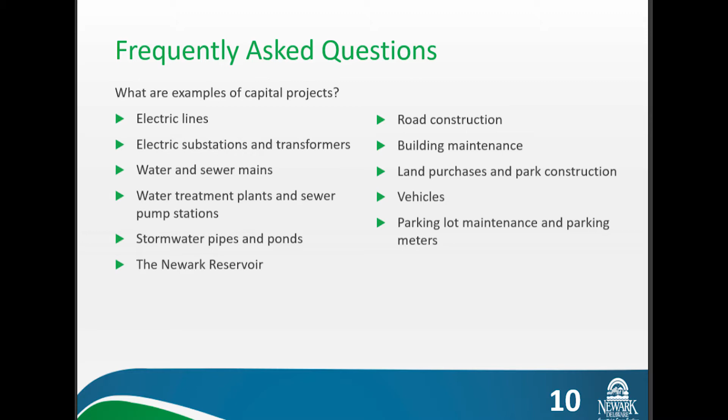Bring that home. For us, capital projects are usually things like infrastructure. The large majority of our capital spending is going to be on items like this, mainly because they're very expensive, and like your house or your car, they need to be maintained or replaced periodically. So how much infrastructure do we have? A lot. I'm going to walk through each of our utilities and give a quick overview so you get an idea of the scale.

We have the most water infrastructure by a large margin, and most of these items are quite expensive. For example, it costs us around $1.2 million to replace 1 mile of small diameter water main, like what's in front of your house. In total, the replacement value of our water infrastructure is estimated at $200 million if we had to replace it all today. That's almost $6,000 of water infrastructure for every resident of the city, and that's just the water system.

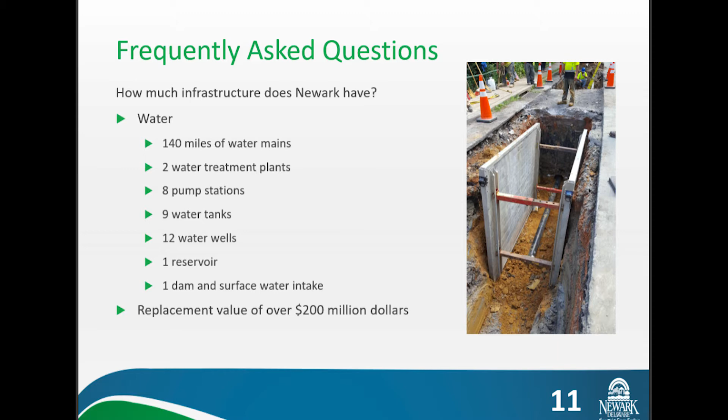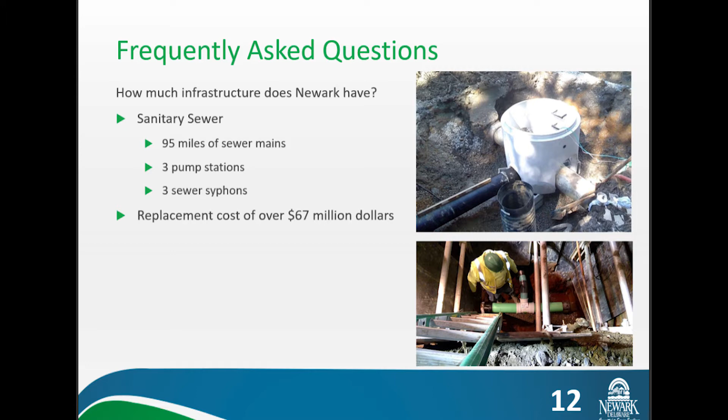We also have a lot of sewer infrastructure. The total replacement value for sewer is less than water because it can be rehabilitated a little more easily, often without digging up the street, but the value is still more than $67 million.

Stormwater is even more than sewer, at around $100 million. Stormwater is a little different in that we have different pipe materials with dramatically different expected lives, to the point that we actually track them and handle them separately. The only type of pipe we're really concerned about at the moment is corrugated metal pipe.

We refer to it as CMP, and CMP lasts around 35 to 40 years. We have about 5 miles of it here in the city, and almost all 5 miles are at or beyond their expected life. The rest of our pipes are reinforced concrete or high-density polyethylene, like that black plastic pipe you can get from Home Depot, just a beefed-up version of that. That has an expected life of around 100 years. So you can see, 35 to 40 years or 100 years - there's a dramatic difference between the two.

In addition to our pipes, we have 65 city-maintained stormwater ponds and facilities, mostly in residential neighborhoods.

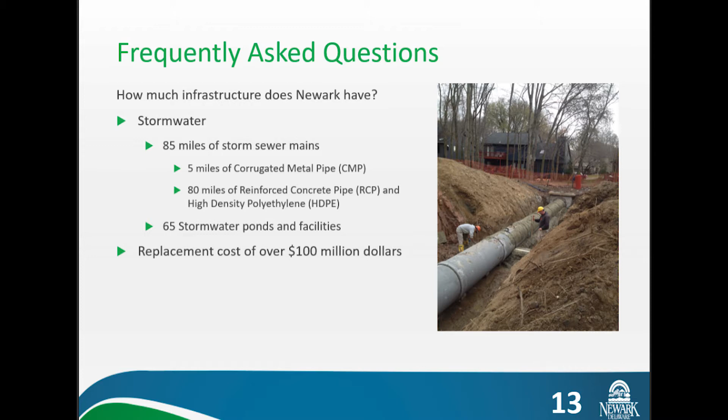Our electric infrastructure is made up of substations, lines, transformers, and our McKee solar facility off of Cleveland Avenue. We estimate the replacement value of the city's electric utility infrastructure to be at $50 million or more.

In addition to our traditional utilities, we also have parking infrastructure like our downtown parking lots, meters, et cetera. With our parking infrastructure, they're treated much like a traditional utility. The revenue that comes in from our parking fund is kept separate, and then we transfer a profit margin off of that utility into the general fund to help pay for general fund things like police, trash service, et cetera.

Lastly, we have city-maintained streets, City Hall, the police station, our parks, and other city-maintained facilities. This is the infrastructure that's supported by your taxes, fees, and those margin transfers I mentioned that come in from the different utilities.

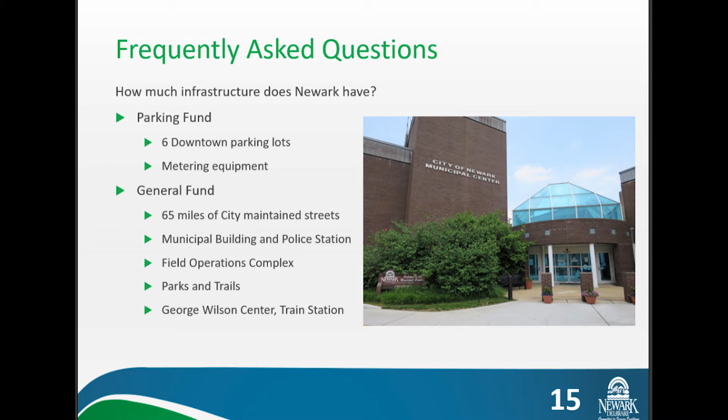In total, we estimate the current replacement value of our infrastructure and capital assets to be around $500 million. That's a huge number considering we're a city of just over 33,000 people. That means we have over $15,000 worth of infrastructure for every resident in the city. And the vast majority of it is underground, or at least out of sight and out of mind, easy to forget about until you hit a pothole, or the lights won't come on, or your toilet won't flush.

So while it's helpful to know how much of everything we have, it's even better to know what condition it's in so we can plan. So what is the condition of our infrastructure? I'm going to go through each type in the same order, and you'll see that we have different levels of information on each one.

Starting with water, I'm going to focus on mains first because they make up the majority of the water system's assets. Getting good condition assessment on water mains is difficult because they're under pressure and have to remain in service at all times, so you can't go in and take a look at the inside very easily.

We've begun piloting some technologies that let us indirectly measure the remaining life of a pipe from the outside, but they're still pretty new and expensive, so widespread implementation hasn't happened yet. In the meantime, we use a combination of our water main break history, water quality complaints, the pipe's age, the pipe's material, and industry guidelines to estimate the remaining service life and prioritize replacement.

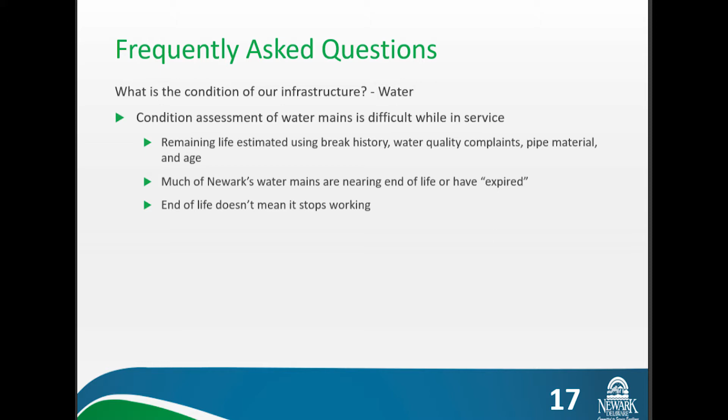The expected life for a pipe depends on a few things: the manufacturing methodology, the material itself, how it was installed, and the soil it was installed in. Generally, the longer the material's life, the longer you have in that constant failure phase.

With water mains, generally, the older the main, the longer the expected life. It's a little backwards, but essentially back in the 1800s and early 1900s, they didn't have the best manufacturing technology, so they couldn't manufacture to tight tolerance. So they would just make things extra thick. Like our water main on Main Street - we have a sample over there on the table - you'll see it's about an inch thick if you go over and look at it.

It's really thick water main, and that was put in the 1800s. So mains put in from the late 1800s up to 1930 have an expected life of 100 to 120 years.

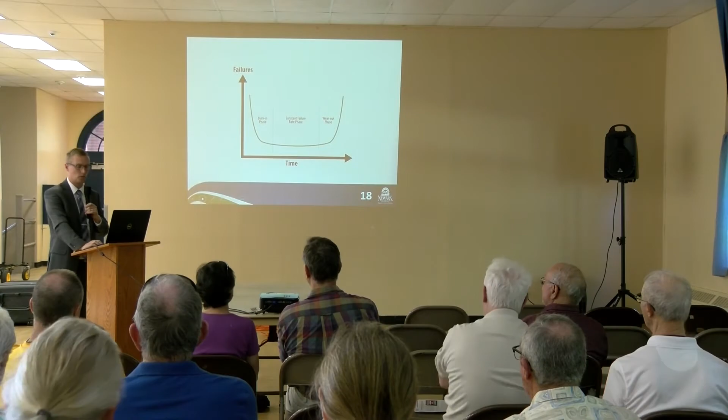So if you've got a pipe that's out in the middle of a field, and you can dig it up without impacting anyone or taking any customers out of service, you can let that pipe break all the time because it's not that big of a deal to fix.

If you've got a water main that's near a hospital, or in your downtown on a main road or an intersection, those ones are very expensive to repair. They knock a lot of customers out. So those are the ones you're going to want to replace earlier, before they start to fail often.

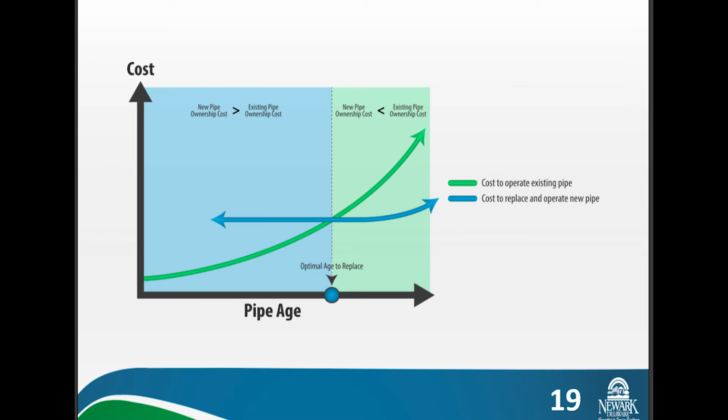So you can't see that at all. All right, I was afraid of that.

So if we continue at our current rate and replace about a mile a year, that's been our target recently—we've been getting close to it, we haven't actually gotten there very often—but if we do hit our target of a mile a year, 15 years from now 59 miles of our system will still be in that expired category, and that's 42% of the system.

And that doesn't include the 140 miles of water mains that I referenced earlier and was on the slide, that's just our distribution system. We have more pipes on the back side of our treatment plants that carry untreated water, so our total mileage is even higher.

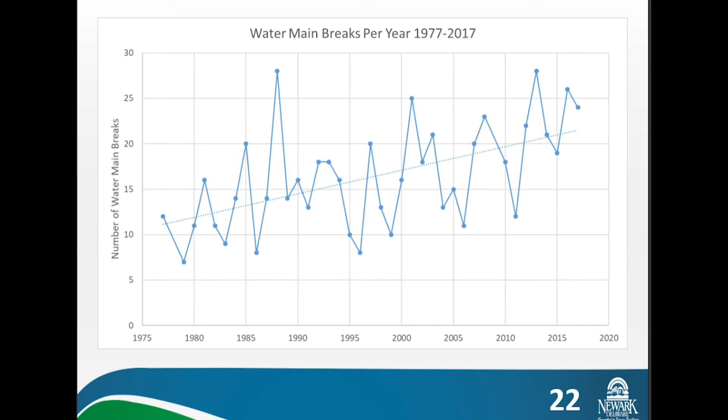So moving on from water mains. Starting around 2011, the city began increasing our water rates from the kind of artificially low rate that was in place prior to that. This allowed for a capital project initiative where we ramped up our spending on capital and started to address some of our deferred maintenance.

While water mains make up the majority of the water infrastructure, the other water facilities have a much shorter life, so they need to be replaced more often. Because of that, they kind of punch above their weight from a budget perspective. We've been really busy over the last 7 years, and we've completed over $17 million in water fund capital projects.

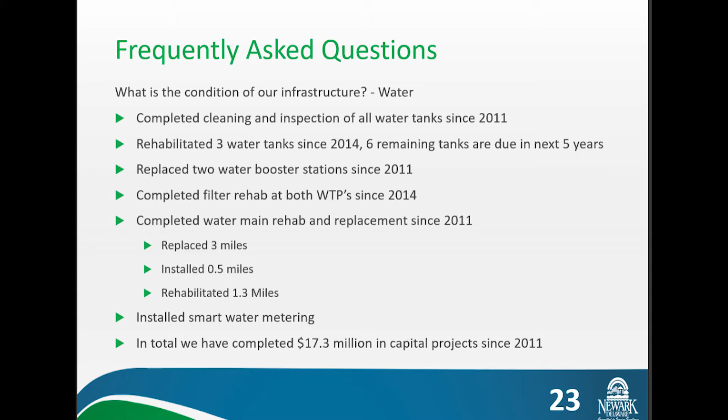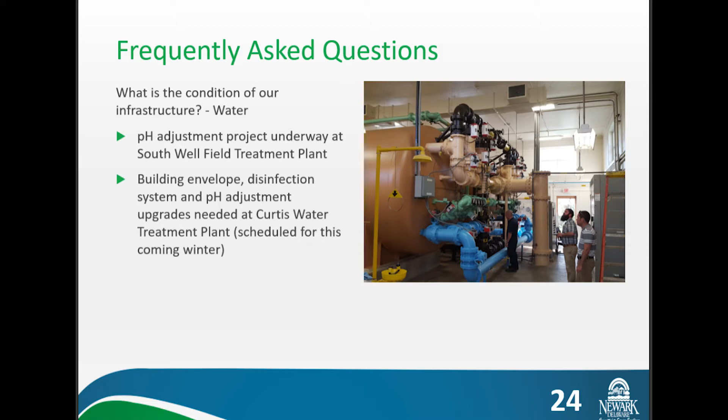We have 2 water treatment plant projects that we have underway or will be completed by the end of the year. One, we just recently finished our South Well Field water treatment plant, which was to replace our existing pH adjustment system. Our second project is at our surface water treatment plant on the White Clay Creek, to convert from gas chlorine for disinfection to a liquid system that's much safer, rehab the roof, rehab the walls. That building is about 30 years old, or a little over 30 years old, so things are wearing out there. That will be completed ideally by the end of 2018.

On the sewer side, we've been working to inspect and develop a prioritization for our rehab work. So far we've inspected about 15% of the sewer system, and we've identified around $4 million worth of high priority repairs. We began making many of the repairs during 2017. We actually have a contract underway right now that should be wrapped up by the end of the summer, I would expect. Since 2011, we've spent nearly $4 million on sewer capital projects, and we've also rebuilt all of our sewer pump stations.

The way a sewer system works is by gravity, largely. It flows downhill, the pipes get deeper and deeper until they get too deep. Then you put in a pump station that lifts it up, usually pumps it over a hill or something, and then it flows downhill by gravity again.

So in Newark, we have three major pump stations, and they've all been rebuilt since 2011.

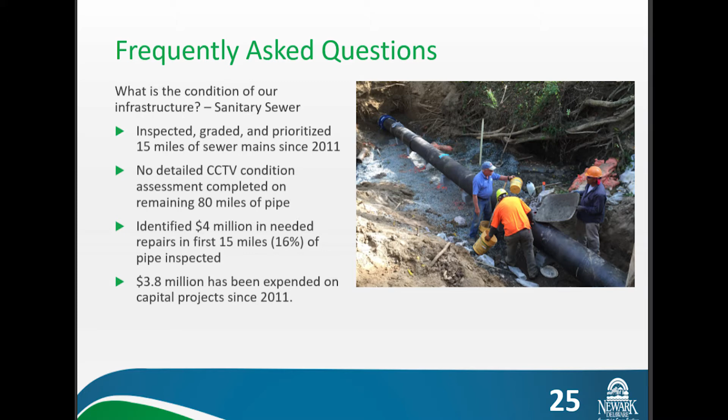On the stormwater side, we've been focused on corrugated metal pipe because it has a shorter service life. Since starting in 2016, we completed a citywide condition assessment and did closed circuit television inspection, where we send a robot up the pipe with a camera to inspect the inside of all 5 miles of pipe. After the inspection, we reviewed and prioritized all the lines, and identified about $3.4 million worth of repairs needed over the next 10 years or so.

As many of you may or may not be aware, Council approved last year a stormwater utility that came into effect on January 1st of this year. Because of that, we have a stable funding source built in, and when we set the rate for that stormwater utility, it had all these projects included in the base rate. So we have the funding we need to do the next 5 years at least worth of corrugated metal pipe repair. That's a great thing.

But that rate was not set to pay for the Rodney project because we weren't there yet on that project. So if Rodney's approved, as we'll discuss later tonight, it'll affect the average residential homeowner about $1 a month.

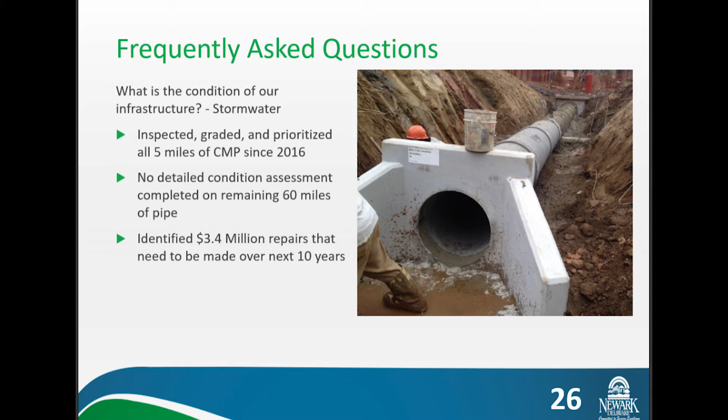For our road network, we have a full pavement management system where we complete an annual inspection of all the roads in the city that are city maintained. We rate them, then run them through an optimization program to develop an optimal project from a cost perspective. One outcome is we ran a few scenarios of trying different spending levels, to see what it would take to maintain all the city's streets at their current level so the average condition citywide doesn't decrease, just stays the same. In order to do that, we need to be spending about $1.75 million a year in today's dollars.

That's a number we've only been able to achieve one time since 2011. We came pretty close last year, within probably $50,000, but we didn't quite get there. Most years we've been closer to $1 million. In addition to that, we have about $1.5 million worth of parks capital maintenance scheduled over the next 5 years that needs to be completed.

So how do we get ourselves into this situation? Well, using only cash limits our ability to tackle large projects because they crowd out smaller, less sexy projects and preventative maintenance. It's a lot more exciting to have a new ribbon cutting than it is to replace a pipe that's generally worked your whole life.

Our water and sewer rates are also entirely consumption-based. So if you leave and go to Florida for a month, you'll come back and your water and sewer bill will be $0. You get it out of the mail, we mailed it to you. The pipes still had to be there the whole time. Our water plant still had to be there. If there's a fire, the fire company could still come and put the fire out in your house using water. So there are lots of benefits you get, but you literally pay $0.

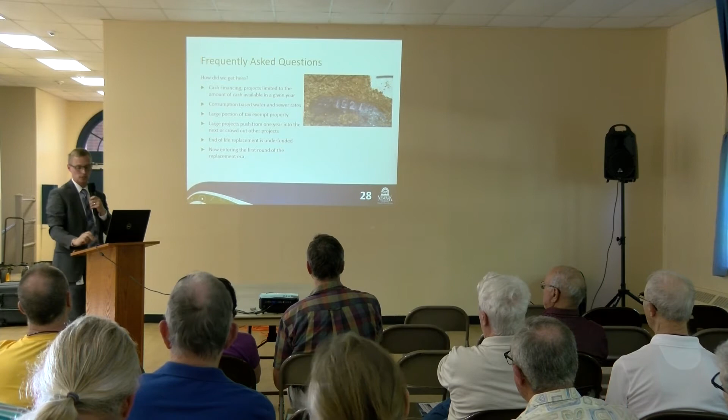Now, all those things said, the biggest issue is that we're entering the first round of the replacement era. Like I mentioned earlier, we're seeing the echoes of the post-World War II development boom. So historically, we have not had to pay for most of the infrastructure we have, or at least through our rates, because it was paid for by developers or the federal government through grants.

So when new development's built in the city and everywhere else, the developer puts in the water mains, puts in the sewer mains, pays for the electric lines to be put in, and then you pay for that as a home buyer the first time you buy your house. But the water, sewer, and electric rates never had to pay for that infrastructure in the first place. So the rates are not set at a level that will be able to pay for that infrastructure.

So even the mains that were installed for the city by a contractor or through a grant that we got directly were generally assessed against the property owners along that road frontage. So if you had 100 feet of road frontage, you were assessed 100 feet's worth of that project cost.

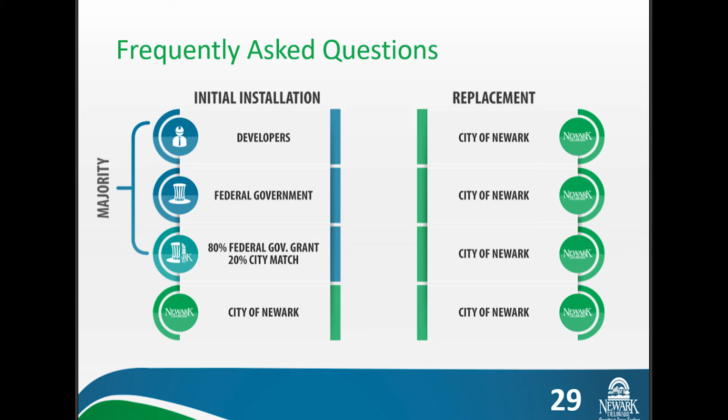So like I said, our tax and rate structure has never had to pay for any of this stuff before. And as it wears out, the revenue demands for our utilities are going to increase significantly over the next 20 years. In addition to that, a large majority of Newark's been developed in an unsustainable development pattern, and that's suburban-style single-family homes. So if you live in a single-family detached home, I can almost guarantee you're not paying enough to cover the infrastructure necessary to support your house based on our current utility rate structure and tax levels.

For example, if you live in a house with a 100-foot wide lot, your taxes need to support, in addition to police and trash and our code enforcement, the paving and maintenance of at least 50 feet of that road frontage, because you figure the neighbor across the road's got the other half. Same goes for your water, sewer, and electric infrastructure.

So using our current cost for water main replacement, 50 feet of water main costs over $11,000 to replace. Assuming 10% of your water bill goes towards infrastructure, using an average water customer, it will take 300 years to pay for that 50 feet of water main, let alone all the other infrastructure like booster stations, water treatment plants, and that sort of thing.

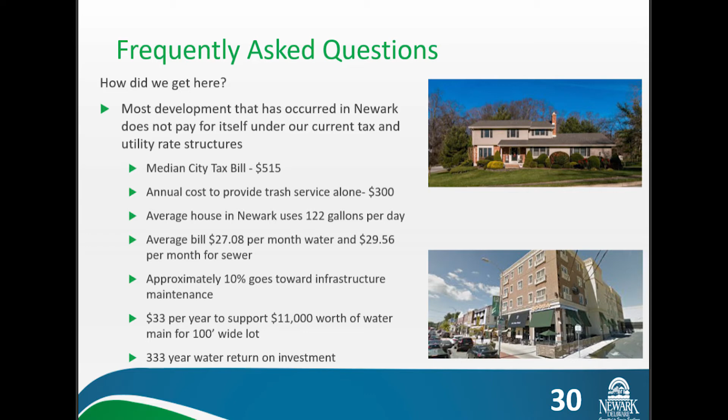So fortunately, we have locations like our downtown, so that building, 58 East Main Street, where Qdoba and Honeygrow is. I ran the numbers for that building, and it will pay off its water main every 2 to 3 years. So we see a very similar pattern in our tax structure and basically all the utilities that use water as an example.

So the median city tax bill, if you didn't know this, is $515. The cost for us to provide trash service to a house for a year is $300. So in the city, 20% of residents aren't paying enough in taxes to even pay for just the trash service that they get, let alone everything else.

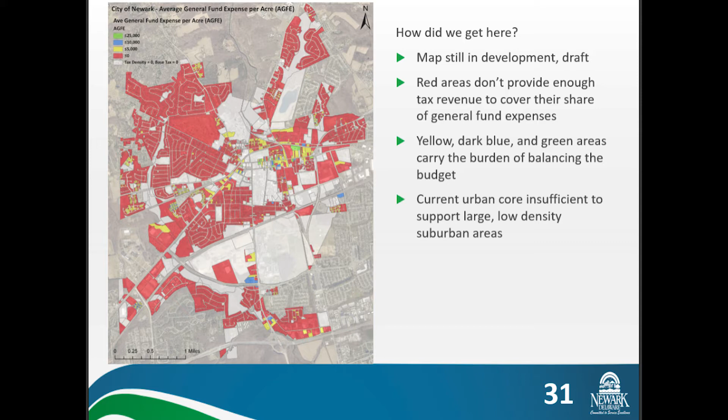So I'm not trying to say, if you live in a condo, you should defriend all your friends and live in a single-family home or anything like that. That's not the intent. The intent is just to have a discussion about where we are in our current situation, so we can make smarter decisions moving forward when development plans come through. We can make decisions with our eyes open and fiscally sound decisions.

So, like I said, it's been a lot of doom and gloom up until now, but it's not all bad news, and I can tell you it's definitely not unique to Newark. Cities across the nation are facing the same problem - cities, towns, and states, believe it or not. They're facing it whether they know it yet or not.

Fortunately for us, we're in a lot better situation than them specifically, but also a lot of our other peers, for several reasons. Firstly, since 2011, or maybe a little before then, council has shown a real desire to tackle this problem and get in front of it. And that's reinforced by the fact that we're here today having this conversation.

We also have a relatively compact city compared to our peers. Dover, for example, has 2.5 times our land area and only 10% more people. So they're going to have to pay for, extrapolate out, 2.5 times as much stuff with only 10% more people. So they're in a much worse position than Newark is.

We're also in the very fortunate position of having the Star Campus, a 270-acre blank slate on the south side of town that will be bringing all new revenue to the city.

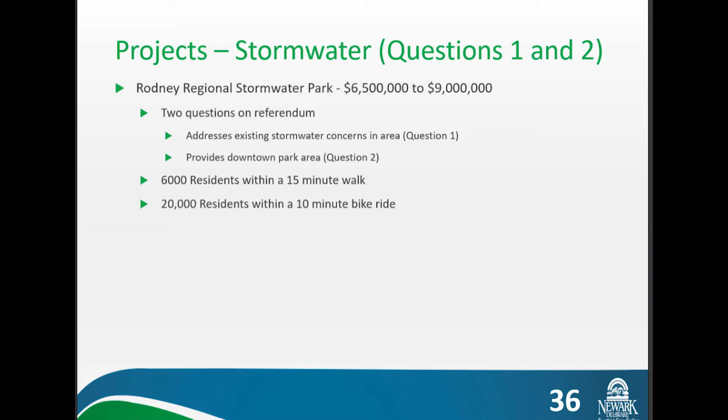So Rodney, question 1, as Tom said, there are 2 questions. One is for the purchase and development, and the second question will be for the parks amenity. Although the project vision was to develop the pond and park together as complementary, we were able to break out the stormwater management needs from the aesthetically pleasing park amenities into 2 questions on the referendum.

A yes vote on the Rodney question 1 would authorize council to borrow money from the state revolving loan fund, which Dave will discuss a little bit later, for the purchase of the property, the demolition and environmental remediation, pond construction, and some minor amenities to allow site accessibility and to maintain the current pedestrian pathway from Dallam Road.

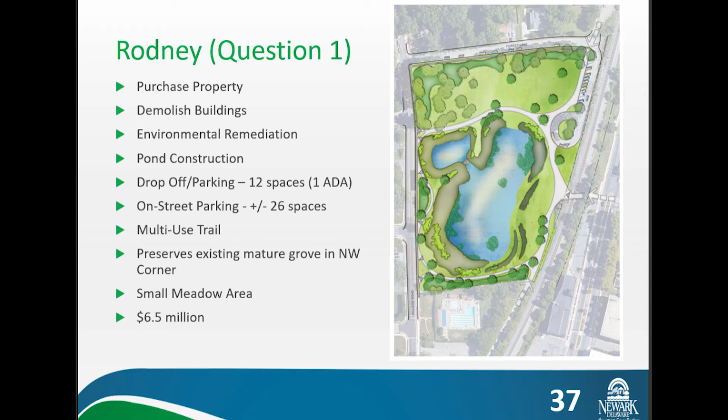The estimated cost associated with this question is about $6.5 million, which Dave will explain a little bit later. Part of that is the fixed cost in the purchase from the university.

A yes vote on Rodney question 2 would authorize council to borrow money from the state revolving loan fund to fund the majority of the park amenities that were discussed and chosen as part of public workshops in the summer of 2017. Residents who participated in this discussion agreed that passive recreation coupled with small classroom space and picnic areas was the best fit for the space.

An accessible fishing pier was also included, but we don't anticipate needing to stock the pond. Most ponds generally end up with some fish in them by birds and other methods, so if it became so popular that we needed to, we could look into stocking it. Extensive educational signage and elements would also be integrated into the site to show residents and visitors the role stormwater management plays in our ecosystem and our city.

As Dave Del Grosso will discuss, the funding for the park amenities through the revolving loan fund is locked at 2% through the state, and the approval is actually awaiting our signature. Funding these upgrades in future years with other sources of funding or revenue would cost more than the 2%.

One quick question, one quick thing.

It's important to remind everyone, I don't know if anyone here came to any of our presentations as we moved through Rodney - we appreciate it, thank you. We had a fairly robust group of folks come out to all three, and we selected these options based on the feedback they gave. It was interesting to see what everyone wanted, and when everybody's answers go up on the board you can clearly see what people wanted. Beer garden showed up, but currently we can't have alcohol in parks. Trails and stormwater management became the top two.

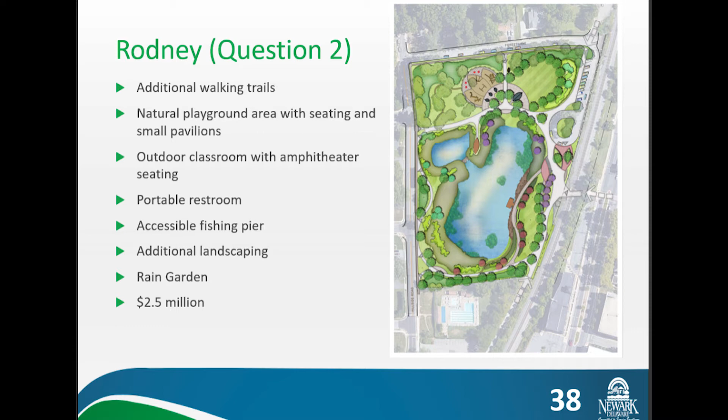Dave will elaborate on the need for debt a little later. So I'm going to get into the individual projects and a little detail on why each one is important to maintaining our water utility.

The Laird Tract well field restoration is actually a new project on some old wells. We anticipate it would nearly double our drought resiliency and bring back some production that was furloughed when the reservoir came online. These wells used to pump directly into the system, but because of high iron and manganese content, we weren't able to pump them into the system once the treatment plant came online. Now, with the reservoir online, we believe we can pump these wells directly into the reservoir and allow the aeration there to take care of some of the treatment, then bring that down to our treatment plant to treat the water and send it out.

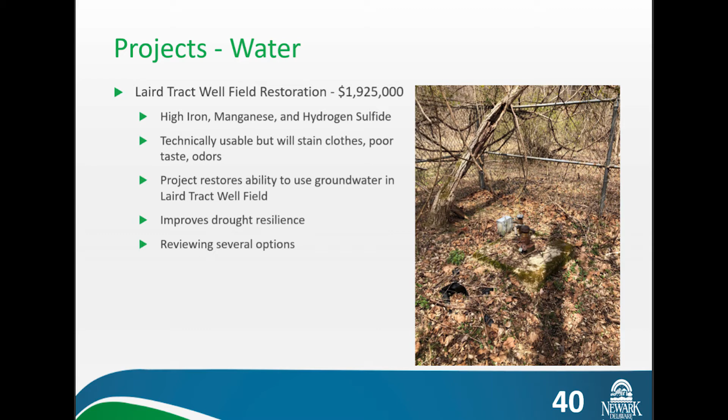These wells are protected, mostly within the White Clay Creek State Park and bordering lands owned by the University of Delaware that are generally wooded and not subject to residential or industrial commercial development - some of the most protected areas of the city, if not the state, due to White Clay Creek's status as a wild and scenic river.

Luckily somebody came up with an acronym for this one - it's called SCADA, Supervisory Control and Data Acquisition. It's an ongoing project which essentially allows us to be in two or more places at one time. We're able to monitor system data, track real-time levels and production, and make changes remotely if possible. At any given time we have one water treatment plant operator on 24 hours a day, and with our two treatment plants, water tanks, and pumps, they can't be everywhere at once.

This is actually a screenshot from the computer. It's a little difficult to see, but this shows the Louviers water tank, the white dome there. It shows the two pumps and then the tank that actually feeds that tank. We can look at that at any given time and see which pumps are running and see the levels in the tanks, and we're able to run these pumps based on the levels in the tanks and make changes remotely if there's an issue at any given time.

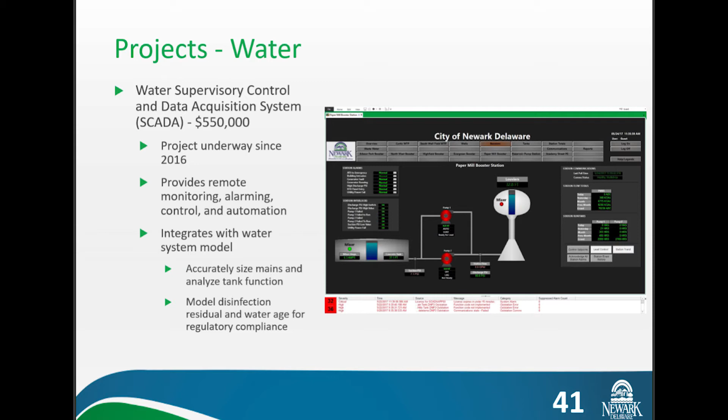You can kind of see here in the bottom two pictures - this is a picture of our rehabilitated treatment plant. As Tom likes to point out, I had a better beard at the time, a little bit longer. This was just completed about 1.5 years ago, and it was just a cosmetic update to the tank and piping system.

But many of you may be aware that the groundwater underneath our South Wellfield treatment plant was recently listed on the EPA's National Priorities List, more commonly known as a Superfund site. The good news is that the contaminants found in the water are easily treatable by our current system. However, the current system is nearing the end of its useful life and needs to be replaced.

We've also experienced having to take some supply offline because we can't treat the amount of water and contaminants coming through, so we've had to reduce the amount we actually treat. A new system called an air stripper would be able to treat more water and get more capacity back in that facility. Other modern upgrades are being vetted for inclusion in the facility upgrade as well. Just so everyone is aware, it still meets federal and state drinking standards for our clean water here in Newark.

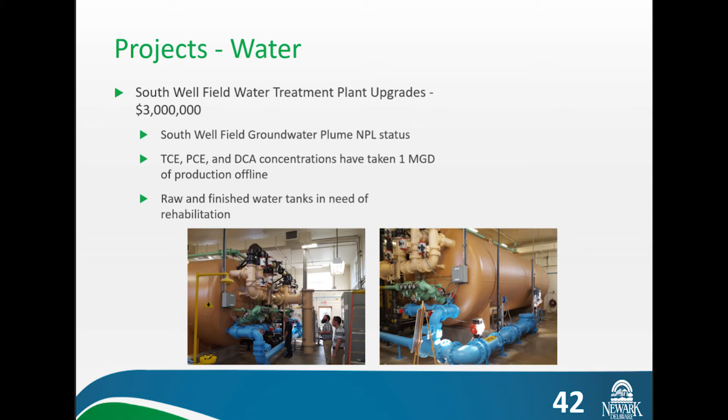So for our water main replacement, these two pieces of pipe are actually over on the table. This is an older pipe, and it doesn't show up as well, but I can show you some of the degradation to the pipe itself. This is just a small section of new pipe. Years ago, and this is actually the plastic that Tom mentioned - the pipe is black pipe inside, and there's white plastic around it that keeps the soil from touching the pipe and keeps the soil from corroding it. The old pipe did not have a cement liner, and the new pipe on top does have a cement liner that keeps the water from reacting with the inside of the pipe and causing the tuberculation you see in the pipe, which you can see firsthand over here.

So we do know, as Tom mentioned, that we need a system-wide study. System-wide studies are not easy, and they're not inexpensive. However, we do have enough information now to target and fix the worst of what we know in this 5-year CIP cycle. As Tom mentioned, it requires a large road restoration, which is a large part of the cost. It should be noted that we have better coordination now with the annual paving program, so that years ago we would go in and put a water line in, then go pave a street, and then come back two years later and put another water line in. I'm not going to say that won't ever happen again if we find a pipe that's really bad, but we've made concerted efforts to stem that and make each project a little cheaper by coordinating the two.

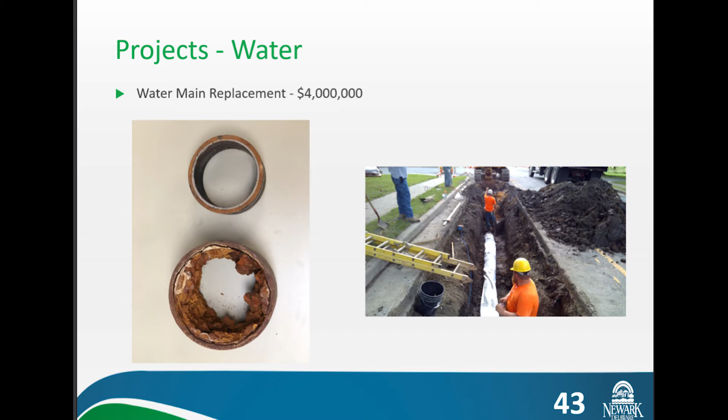We're still evaluating that, but if it's cheaper and we can get a longer lifespan out of some of these tanks, then we're going to go ahead with the full replacement. If we do end up painting, we have our specifications drafted to reflect state regulations, and that will be in place before we begin any of this work.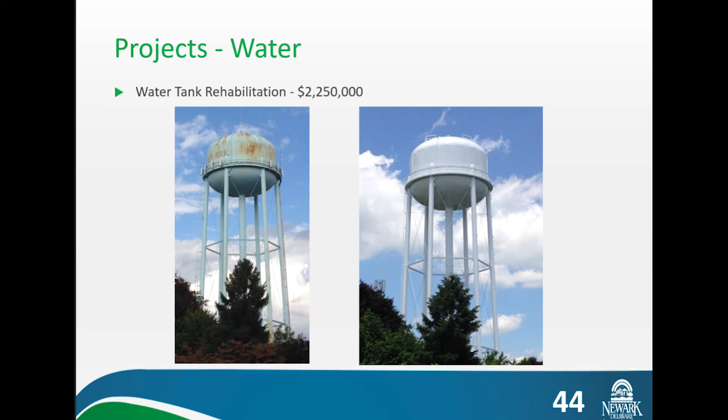Also included in question 3 are some of our sewer projects. Our sewer projects are essentially one project with several different steps in the rehabilitation process. As Tom mentioned, the first step is to identify the critical lines and perform inspections using closed circuit television, or CCTV. The CCTV inspections are then reviewed, and the defects in the pipes are prioritized in a report that we use to group the projects for similar rehabilitation methods.

There are some pipes that simply need a small repair in maybe a 10-foot section of pipe that's collapsed. Others have roots growing in them, and they need to have the roots cleaned. And then what we do is we put a liner in most of these. As Tom mentioned, most of these are fairly deep, so we'd have to have a huge excavation to actually get down to them, and then put the road all back together. So instead, we actually put a sock, essentially, into the pipe, and then expand that with either steam, hot water, or a UV light.

And then it cures in the pipe and essentially makes a new pipe inside of the pipe, extending the life of the pipe by 50 to 75 years. As Tom mentioned, they are deeper, so we end up lining more than we dig up and replace.

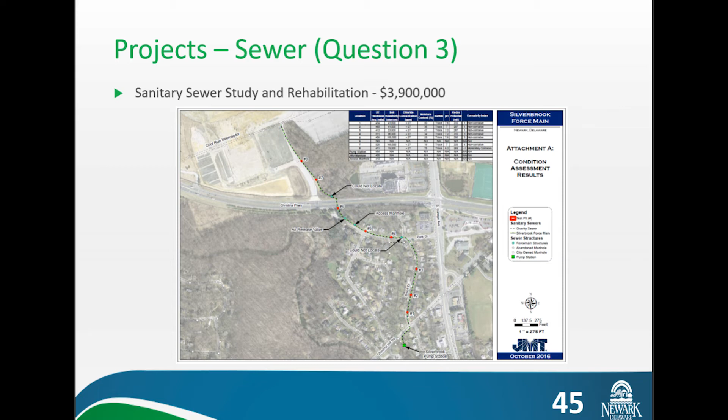Question 4 deals with our general fund projects. These are included in the proposed debt financing because many of these projects are necessary for the operation of the city, yet they always seem to get a lower priority than utilities and other projects.

Our ADA transition plan has been in place since about 2008 and utilizes city funds as well as federal block grants to upgrade handicapped accessibility and transportation routes to comply with current ADA standards. We've replaced nearly 1,400 of the 1,800 existing ramps, as well as upgraded many city-owned facilities, including this facility and City Hall.

So we have about 10 years left to get all of the current ramps up to federal standards, but as soon as we get done meeting them, they'll probably change them and we'll have to start over again. So this program will probably stay in place for the foreseeable future.

Hard surface improvements are basically our parks, tennis courts, basketball courts, trails and access to those facilities. Our park system is very well used. The Hall Trail and Pomeroy Trail, and just recently the Reservoir Trail, are in the top 3 used trails in the state of Delaware.

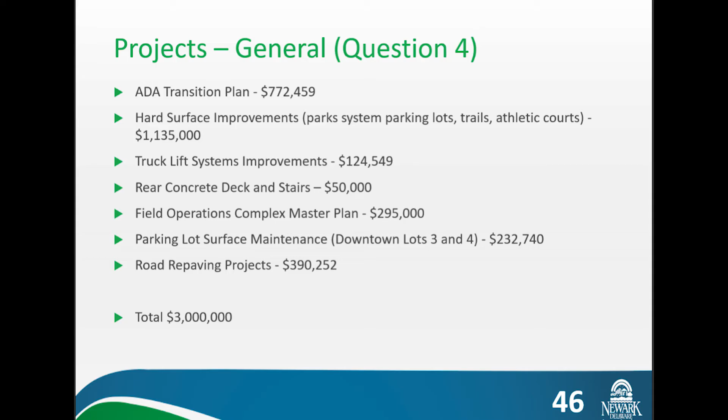Phase two will demolish a warehouse which is partially collapsed and replace it with a more functional system to keep this equipment out of the weather. So with that, I'll turn it over to Dave Del Grande, and he's going to discuss why we're looking to finance using debt and why it's advantageous for municipalities to do so.

Thank you, Tim. Hi, everybody. I feel like you should all get a prize for being our last class tonight. I wanted to have our 10th meeting as maybe a Newark night at the park showing this, but it got beat up by Incredibles 2. I can understand why sometimes.

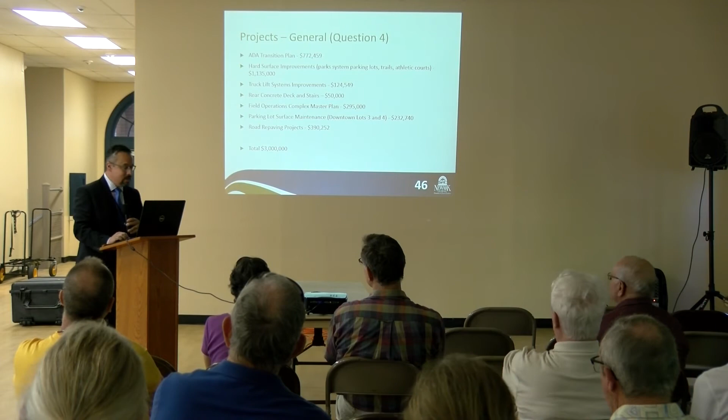But why are we doing debt? This is basically the whole reason for everything here. So the city has used cash historically to fund the majority of our capital needs.

Debt financing accomplishes two goals. One is that it fairly allocates the cost of the project over its useful life, allowing everyone to pay their fair share of the cost over the time that asset is in use. The other is that long-term debt has a minimal impact on our annual budget, keeping the city's annual revenue requirements as low as possible. Low needs in revenue translates directly into lower utility and tax rates and the fees the city has to charge for services we provide to everyone.

So there's three funding sources we've been talking about tonight: the state revolving loan, the bond issuance, and your standard loan that everyone's accustomed to.

Starting with the state revolving loan, it's the most advantageous method for us to finance all of our water-related projects. Due to its federal support, the state is able to offer low-interest loans on a competitive basis to all government agencies within the state of Delaware. The low interest and closing costs associated with these loans make it very attractive for us, especially when the rates in the bond market begin to rise. As you know, yesterday the Fed Reserve raised the rates again another 25 basis points.

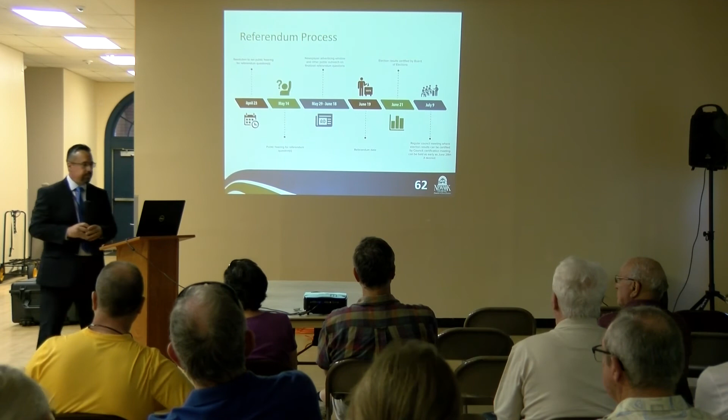When we started this process, like I mentioned at the beginning, our charter outlines the steps we have to follow to take on debt, and one of those is having a referendum. It actually outlines very specifically the timeline you have to follow. We're all the way through to June 19th, the black one in the middle, that's the referendum, that's Tuesday. Polls open at 7, close at 8 p.m. After that, once we get the results back, the election board and council both have to certify the results.

Assuming everything moves forward and the projects are approved, following July 9th, in accordance with the schedule we've proposed for when projects would start, we'd begin developing the final engineering plans, put the projects out to bid, get those results back, and bring them to council.

One thing I failed to mention earlier: for these questions that have multiple projects, since all you are doing is voting for or against authorizing the borrowing, those projects have to come back to council. If there's a single project in there that you don't like, you don't have to throw the baby out with the bathwater. You can still vote for it and then notify your council person, Councilman Lawhorn or Clifton in the back, that you voted for the whole thing but don't like that one project, and don't think they should approve that one. You still have that option available to you.